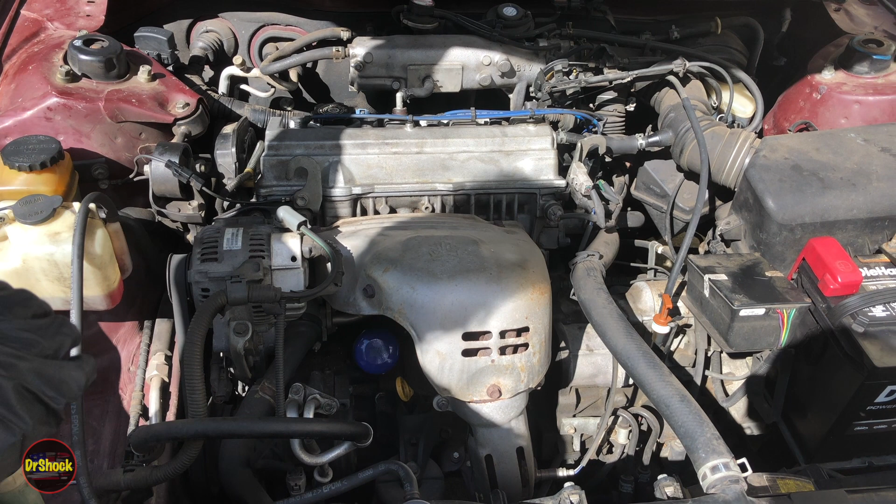Alright guys, in today's video, simple maintenance video, we're going to do an oil filter and drain plug gasket swap out on this 2000 Toyota Camry with the Toyota 5S-FE 4-cylinder engine using all OEM parts. If this is something new for you and you haven't learned how to maintain this particular engine, stay tuned and we'll walk you through it. We're going to pull up some ramps and get started.

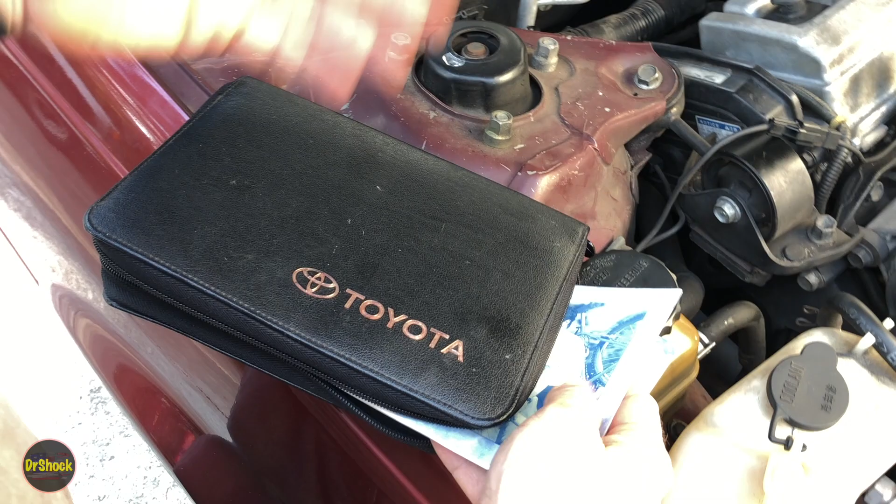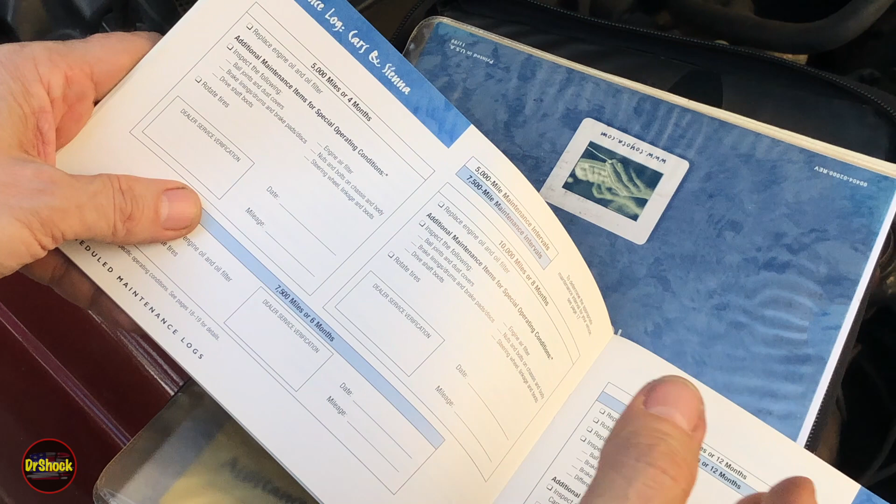So how often do you do this maintenance? Well, if you consult the owner's manual packet and pull out the scheduled maintenance guide, we can see that replacing the engine oil and filter is every 5,000 miles or every 4 months. That repeats through this entire manual. So that's the deal, every 5,000 miles, every 4 months. This is back in the days before it would tell you on the dash when you needed to change the oil. You had to keep track of it manually.

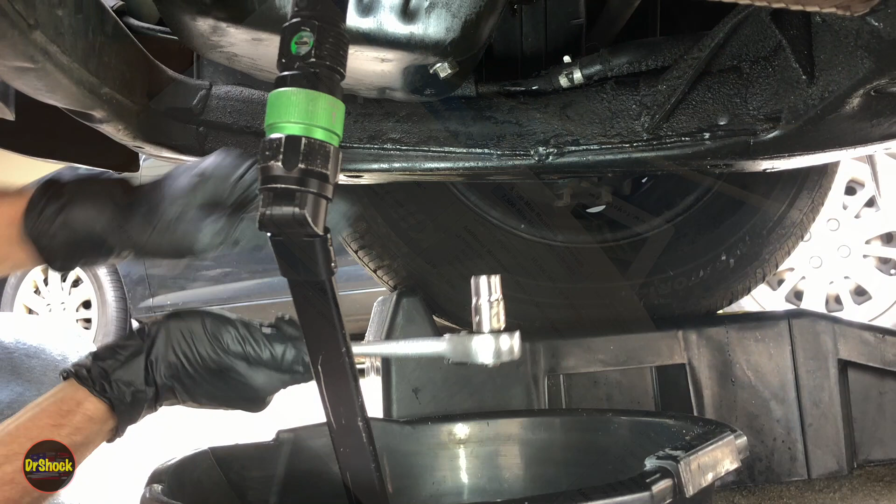Alright guys, it's a 14 millimeter drain plug. We're going to pull this off, and then we're going to replace the gasket that goes under this drain plug. I'll show you the Toyota part number for that. This vehicle we just recently worked on had a problem where it was leaking from the camshaft cover, so there was a lot of oil runoff the back that we got to clean up as well. So it's just giving this guy the full white glove treatment here. 23 years old, trying to get it back up to spec. Let's let this run out and I'll show you the part number for the gasket.

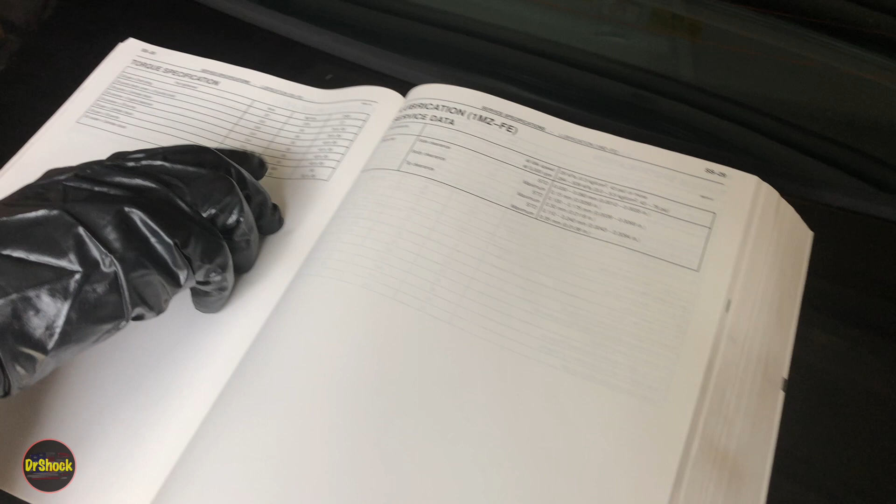Alright, consulting the Toyota service manual. This is for model year 2000, but it's going to be the same for all these engines, the 5S-FE engines. Our drain plug is torqued to 27 foot-pounds or 37 newton meters.

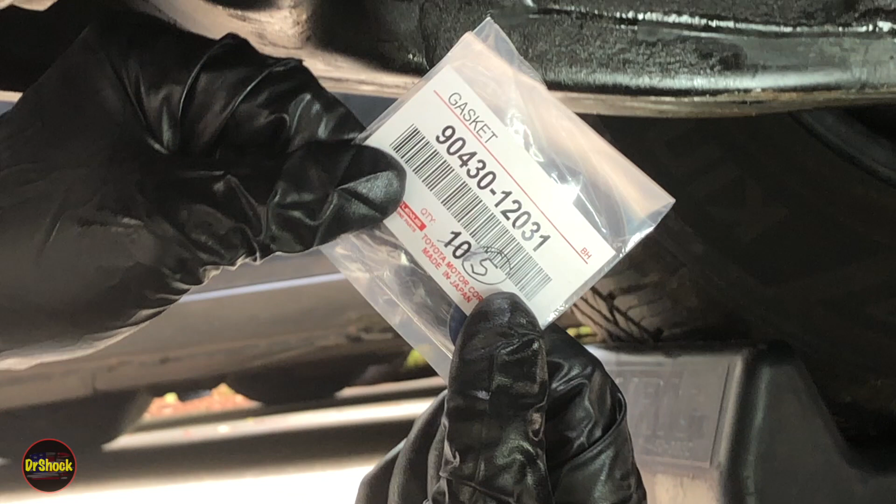Alright, we're going to put our plug back on. We're going to put a new plug gasket on. It's a Toyota part number 90430-12031. It's still weeping out here, but it just went to a drip, and that's the right point to go ahead and move on.

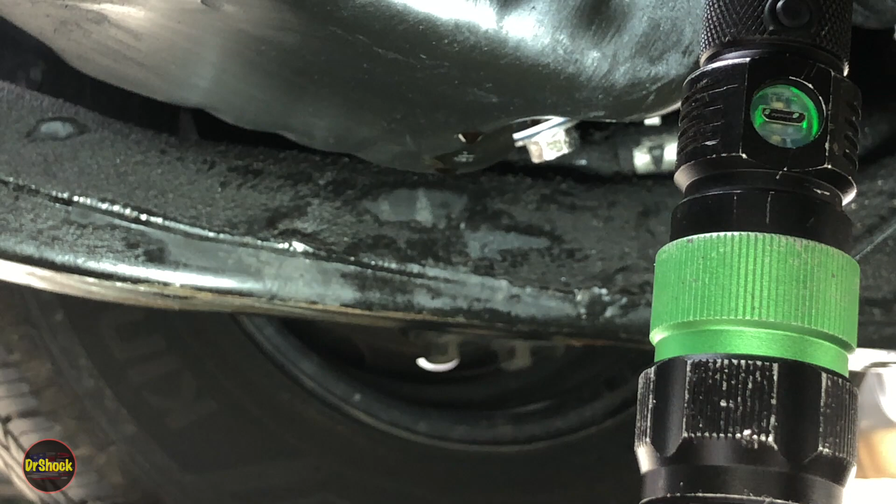And then we're going to torque this drain plug down to the factory specification of 27 foot-pounds. So we'll just use a regular ratchet to get it snug, and then we'll switch to our torque wrench to finish it up.

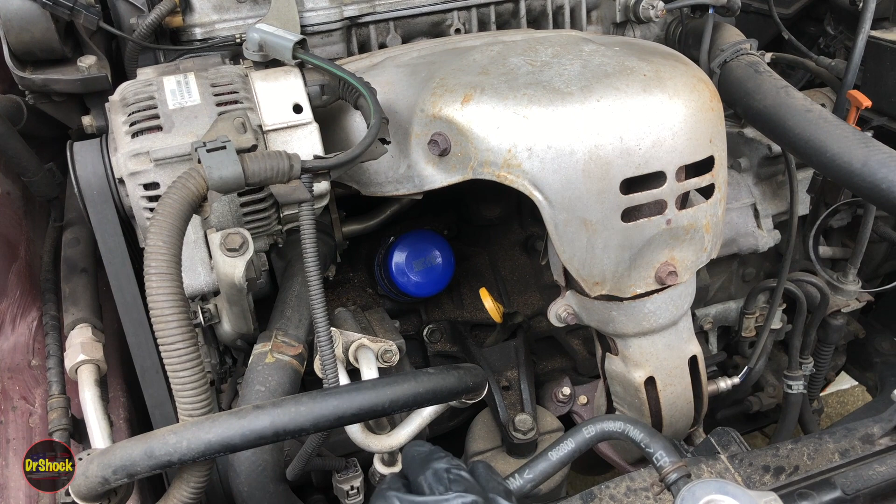Okay, now we're done. Let's go back on top, take care of the filter. Alright, let's get this aftermarket filter off out of here. You can get this off a number of ways. I'm just using a strap type oil filter wrench to get it loosened up and get it the rest of the way by hand. Now sometimes you get a little bit of runoff like we got right there, which I was hoping had all run down by now, but sometimes it doesn't.

Creates a mess. Just make sure your oil pan is underneath to catch it. Alright, we'll go ahead and let that drain down and we'll come back.

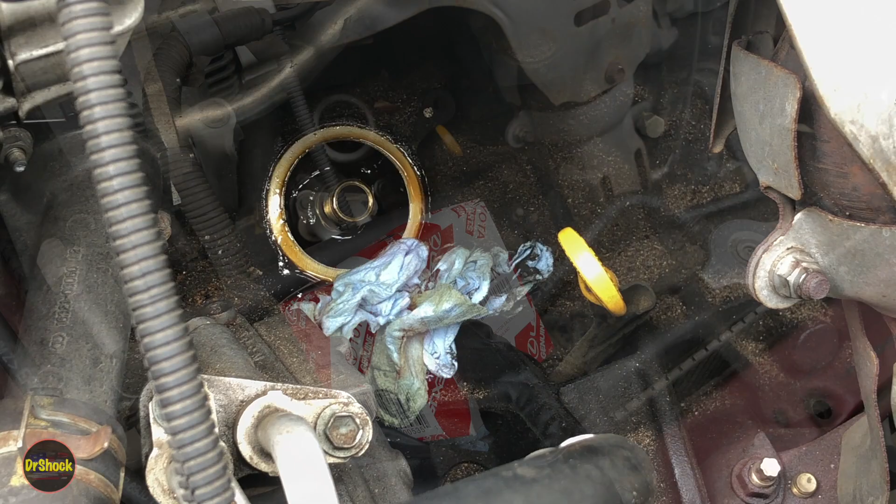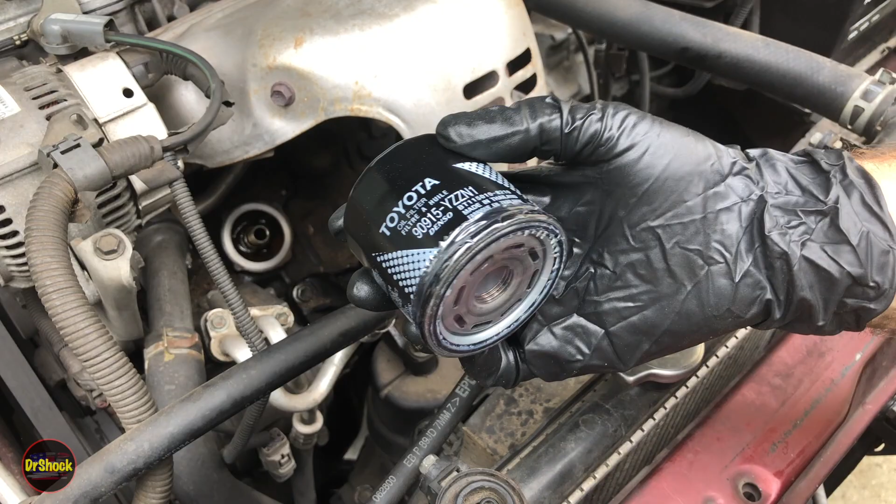Alright, we're going to replace this with a Toyota 90915-YZZN1 filter. Looks like that, it'll be sealed on the bottom. A lot of times these are counterfeit products, so you'll want to make sure whenever you order it, you're getting it from a reputable source.

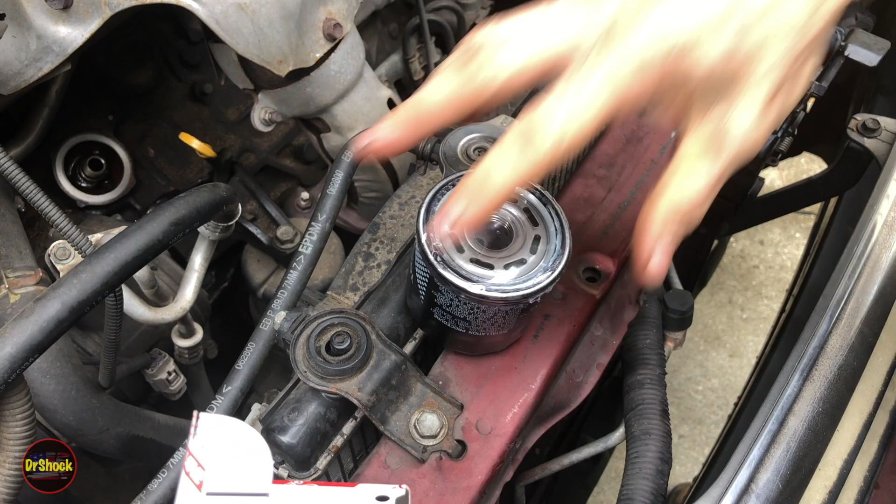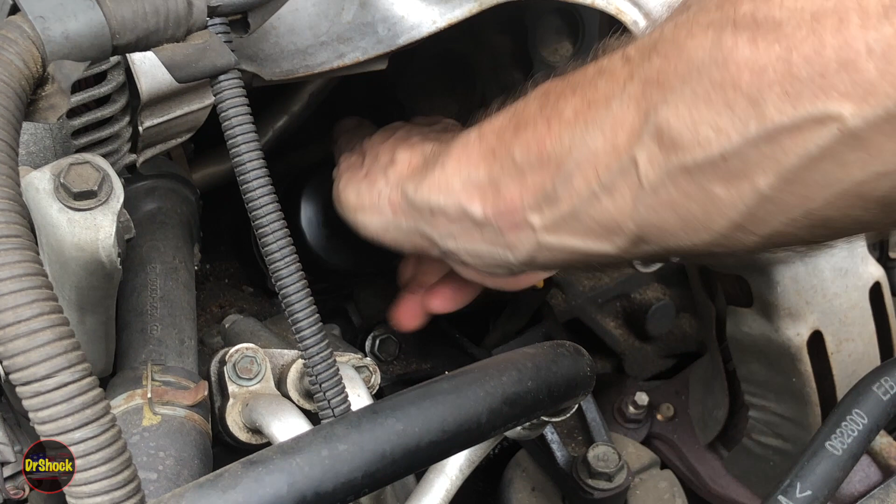Of course, we're going to have trouble getting this off with our glove on. It's already pre-lubricated, that's why it had that seal on it, so you don't put any oil on an OEM filter. But we did clean off the mating surface down here, and we're just going to hand tighten this.

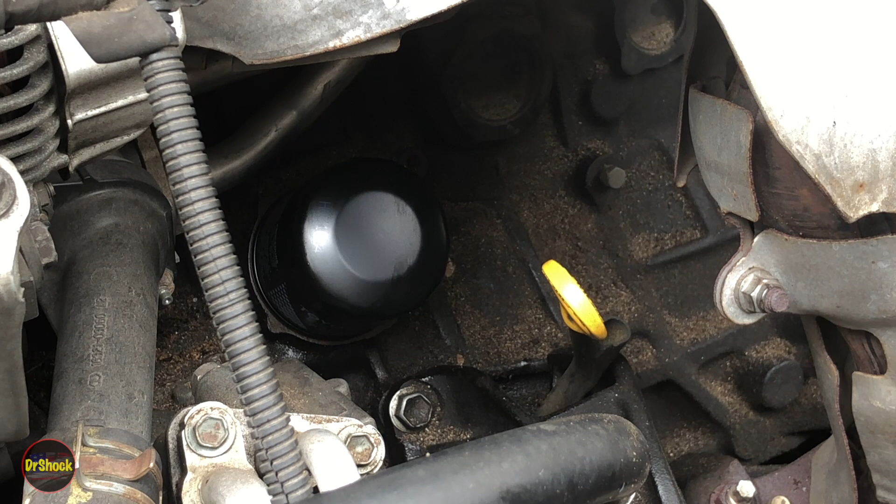And now what we're going to do is give a blast of brake clean over here to get any residual oil from these previous spills as well as this one today.

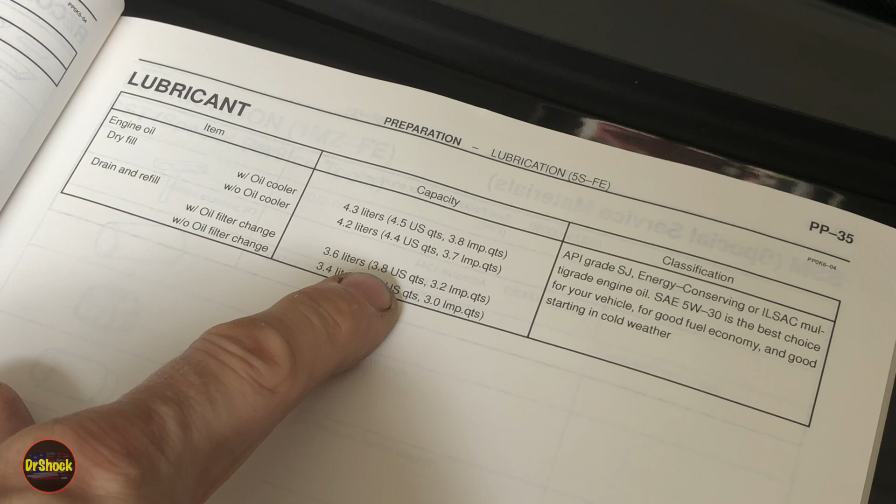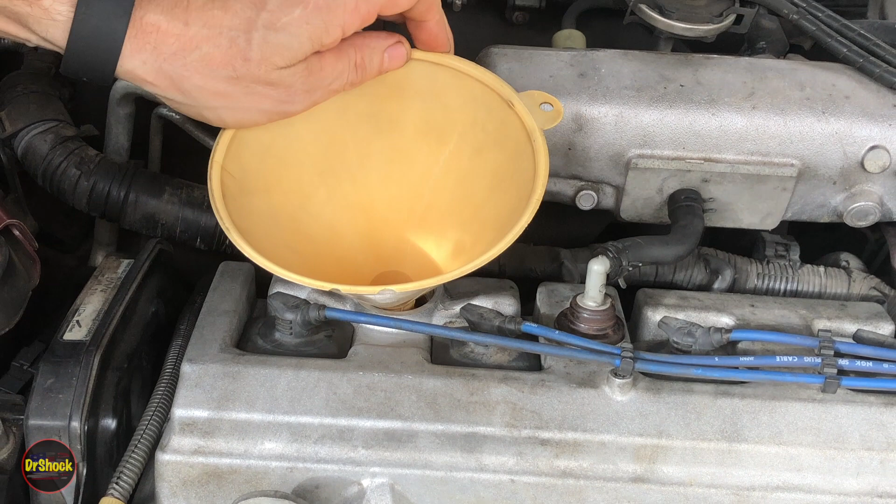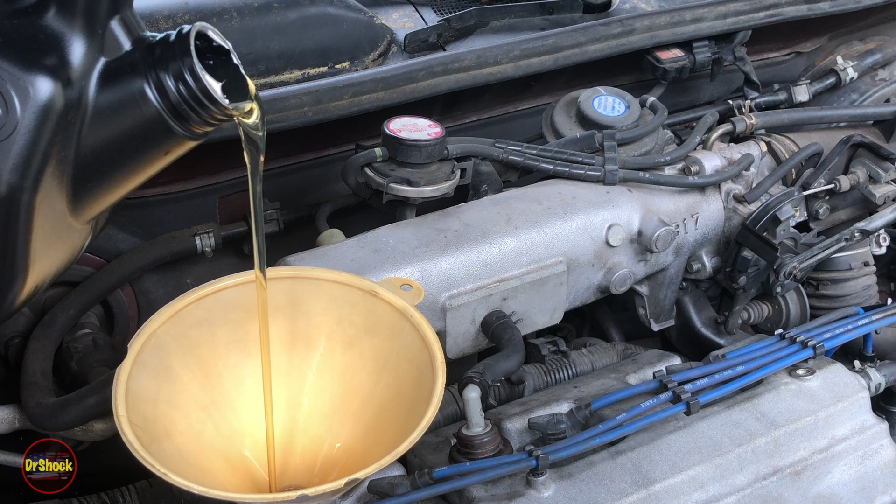We're going to put our 3 quarts in here, and then we're going to start it up. We'll get it off the ramps, and then we'll do the rest with the dipstick down in the front. We'll pull it off the ramps, and come back when we do the final adjustment with the dipstick.

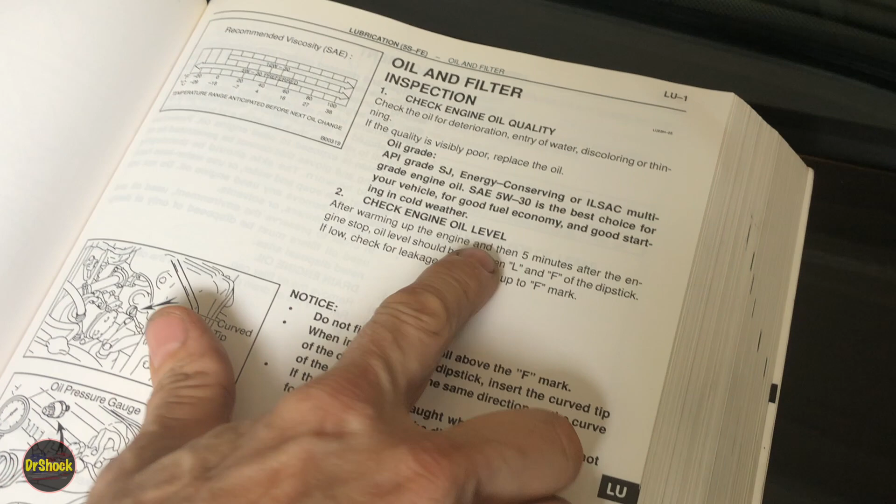Consulting the service manual again, just a few tips. They tell you to warm up the engine for 5 minutes, and then you want to get the oil between the L and the F mark. Obviously you want it up to the F mark, but not past it. I'll show you how to read that in a moment—this can be kind of faded on these older engines.

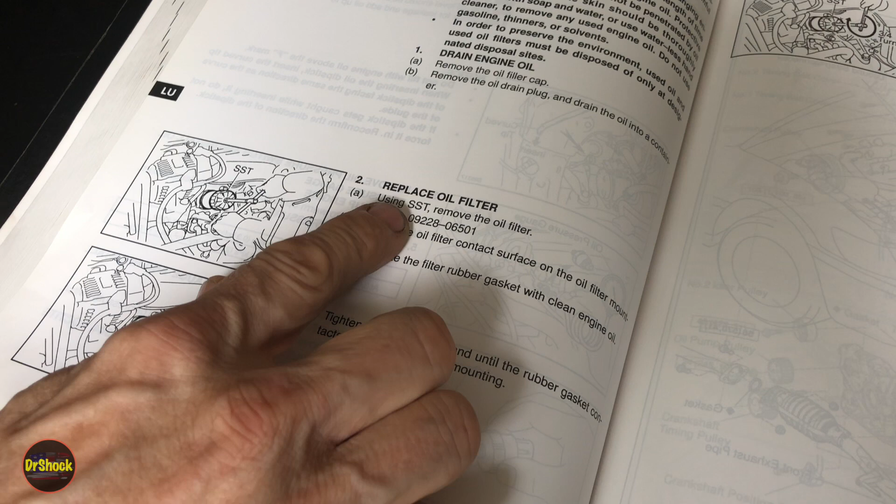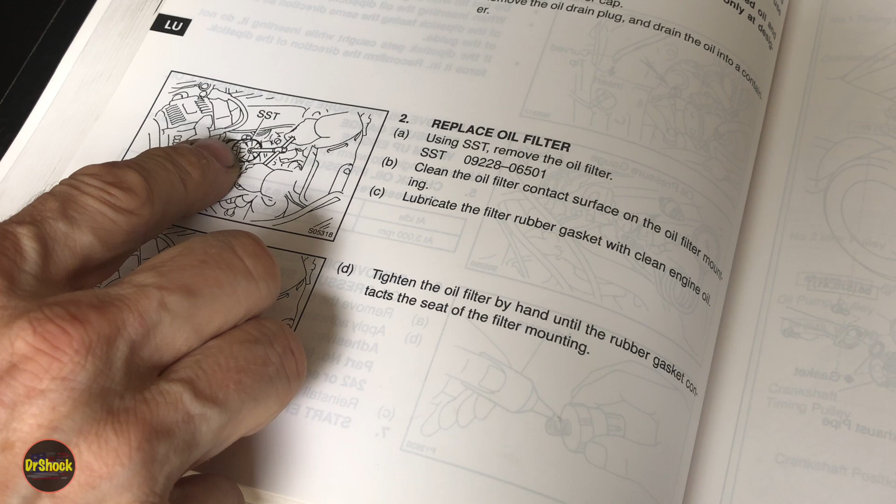Going over the beginning part of what the service manual has to say, they talk about using a special service tool to remove this. It's just a cup wrench, and that's something you can use. We can use the band wrench like we use, you can use a cup wrench, you can also use a strap wrench. There's even a type of pliers for these types of filters to get off. Whatever you can get in there is fine.

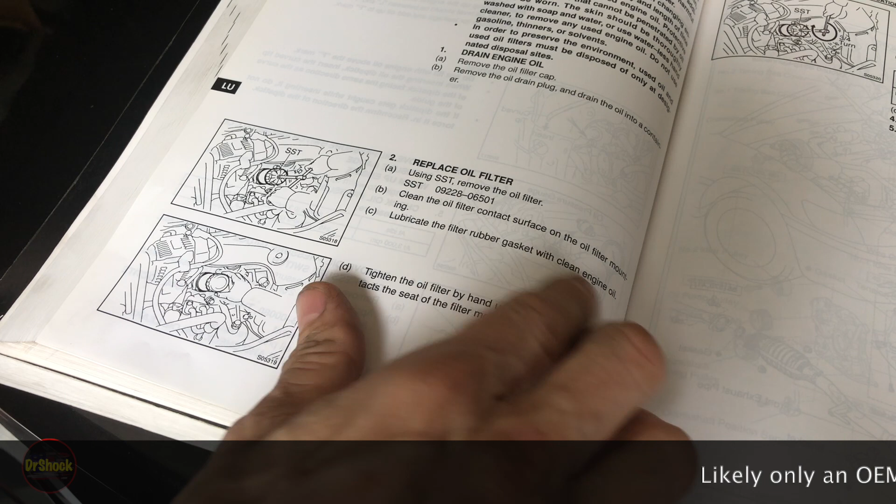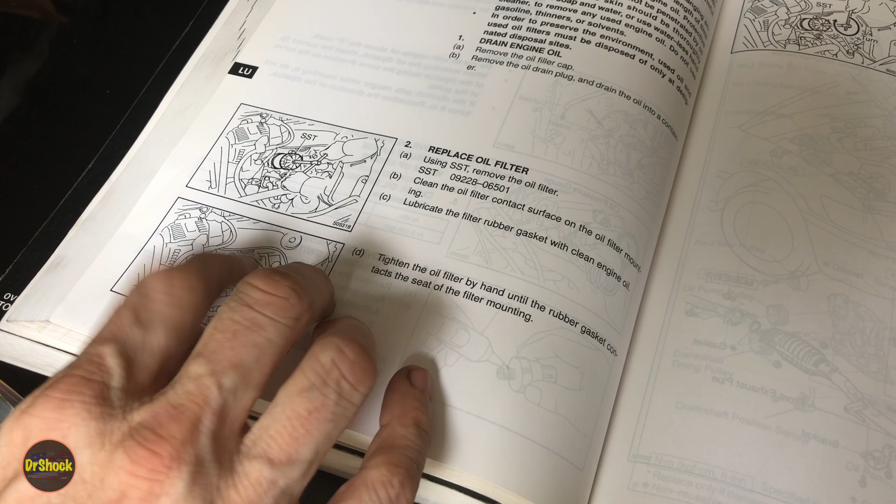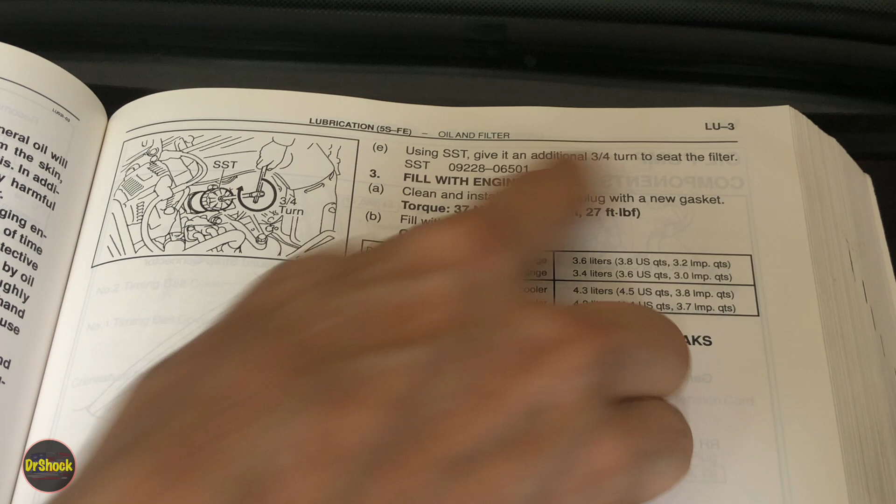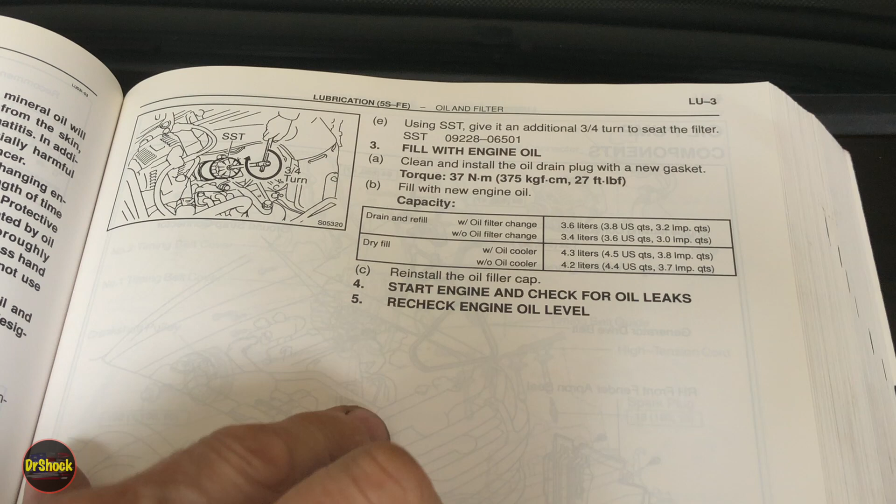When they talk about lubricating that rubber gasket with clean engine oil, that's old—they now come pre-lubricated out of the box, so that's kind of a deprecated step. Tighten the oil filter by hand until the rubber gasket contacts the seat of the filter mounting, which we've done. There's not a torque value, but what they suggest is you turn it 3/4 of a turn after hand tightening. Then fill it with oil, torque the drain plug to 27 foot-pounds as we already saw, and add 3.8 quarts as shown earlier with the filter change. Start the engine, check for leaks, and recheck the oil level after putting the cap back on. So we're going to go through all of that.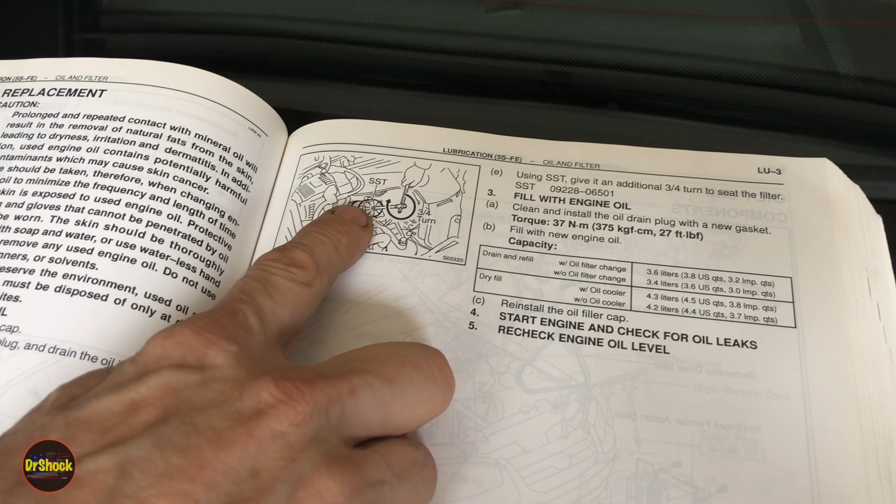We're going to use our strap wrench to do this 3/4 turn adjustment. I don't really call this a torque value, but it is something they recommend for tightness. Now we're just going to put the strap wrench back on, and give her another partial turn like that, and we're done.

Let's see where we're at. Okay, we look like we're okay. But let's wipe it off and double check it.

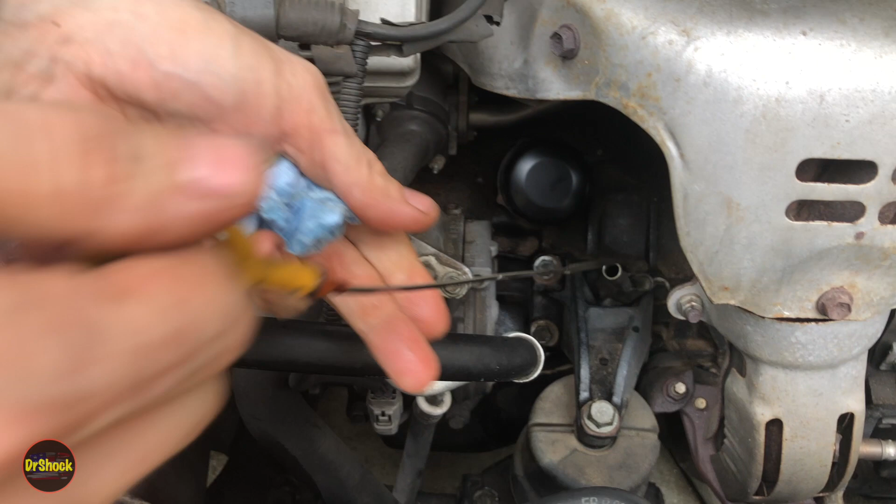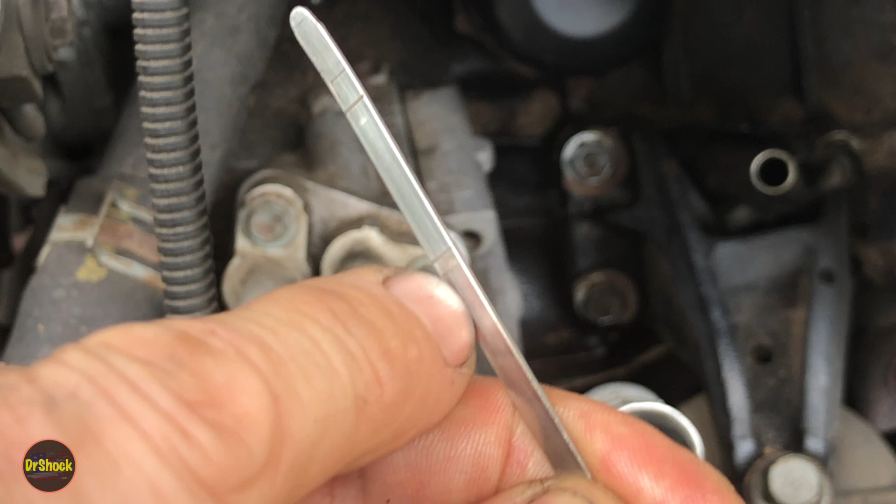Yep, there we are, right below the full mark. So if I wipe this off and we zoom in, you can see it's kind of faded after this many years. But there's a mark with an L—right there's the L. And then there's a mark and there's an F right in front of it. It's very lightly stamped, and you want to have it be as close to this F without going past it, to be in line with what the service manual is telling you. In this case, we have it.

So all we have left to do, guys, is put our cap back on, and this job is done. We ended up putting in exactly what the service manual suggested, 3.8 quarts in this case. Your case may vary—it may be 3.6, it may be 3.7, it just depends on how much came out when we did the drain.